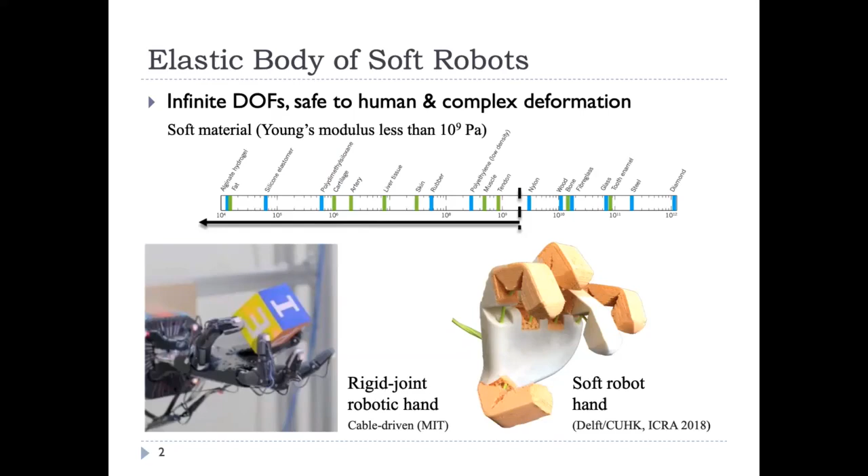We started this project on soft robots while working in the Netherlands, because the Netherlands is very keen on using soft robots in many agriculture applications and biomedical applications. We started projects from this kind of setup, and here are a few examples of soft robots that demonstrate the environment of soft robots, like pick and place of objects which are very soft.

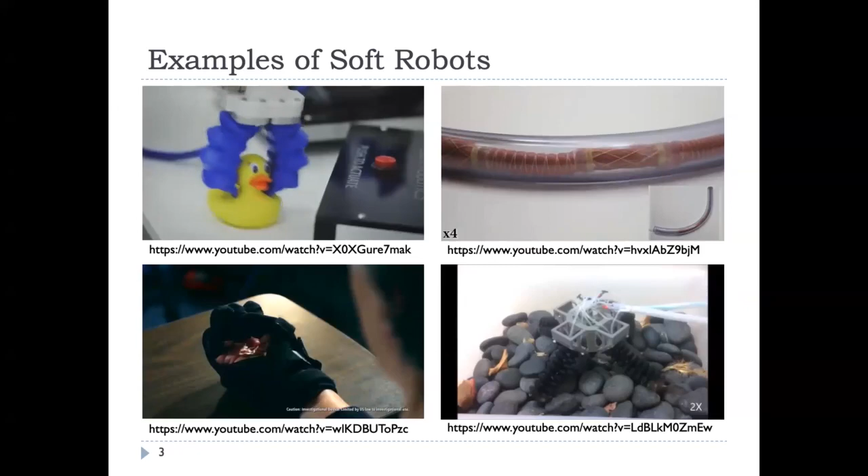One of the very advanced functions of soft robots, instead of hard body robots, is that they're very good for exploring environments you have no idea about. A major function of soft robots is that they allow collision, instead of the general motion planning of a hard or rigid body robot, where an articulated robot is designed to avoid collision. Soft robots try to use collision to explore unknown environments, and the material compliance provides a great opportunity for grasping and manipulating objects with large variation of shapes and geometric complexity.

Here's one example of why we want to do this, because we are actually a design manufacturing group. But if you look at soft robot problems, many of them come back to the design problem - how you're going to design it.

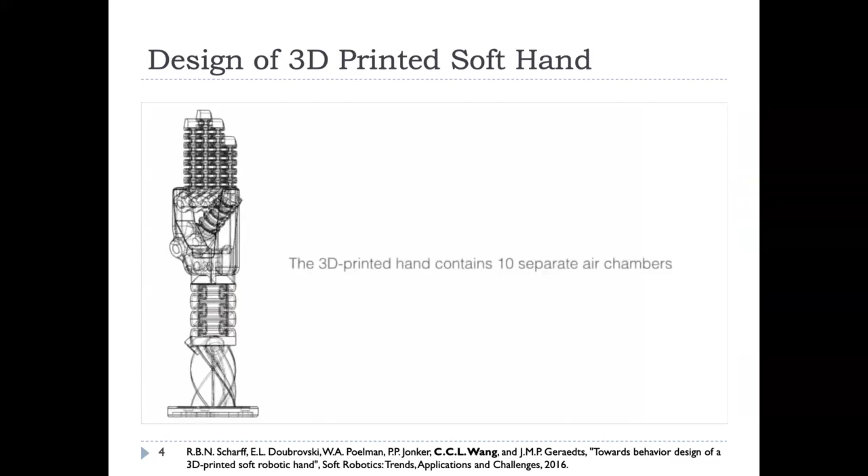10 chambers. This shows how complicated the channels inside this soft robot hand are, and how this soft robot hand is able to generate different kinds of displacement, different kinds of deformation, and how you're going to well control this deformation.

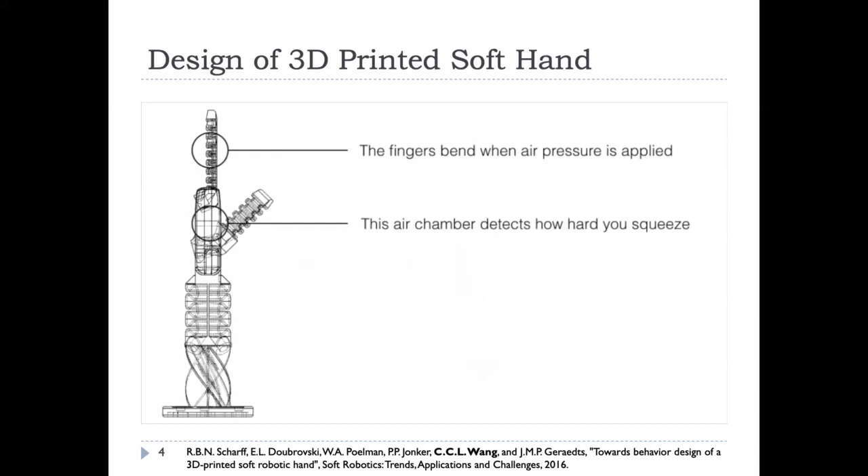There are a lot of design problems there. This is because at Netherlands, I'm working in the industrial design faculty. And so this gives us a lot of interest to see why we try to use soft robots, how to manipulate, how to control those soft robots. And then this brings a lot of challenging problems as well, because basically this is not a well-defined problem, and also brings many grand challenges, which I would like to highlight a bit in the following slides.

But before that, let's consider the conventional robot versus soft robot. What's the major difference? Conventional robots, no matter if it's an articulated robot or delta robot, have limited degrees of freedom. This is a general setup, so that's why we can get all those analytical formulas for kinematics, which can be used in control theories to control the manipulation or operation of rigid robots.

If you're looking at soft robots, basically they have a large number of degrees of freedom in the deformation, which is hard to control. They also have a very small number of degrees of freedom in the actuation. Think about the real actuation we have in the soft hand, like 10 chambers - we only have 10 different flows which can be controlled. So the degree of freedom in the actuation is much, much lower compared to the degree of freedom in the deformation, which is quite a challenging problem, and we are trying to really tackle this problem in our research.

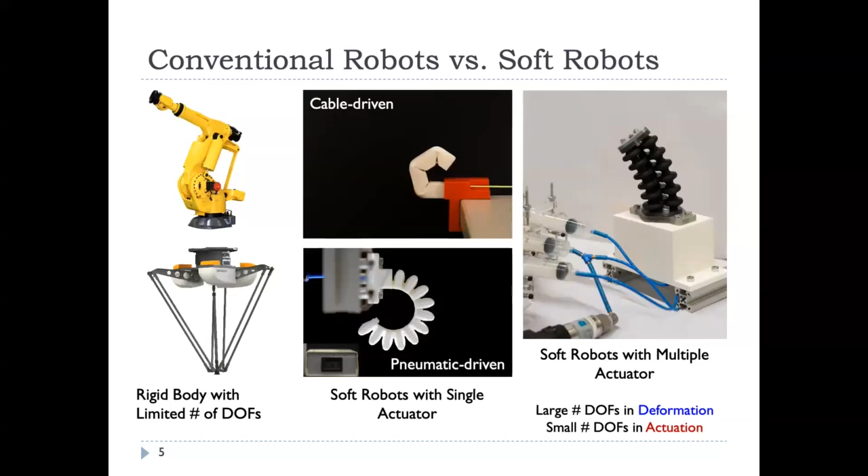One is rapid design tools, which are really lacking, because you need to have a simulation-based optimization in the loop of design. Consider finite element analysis - even for linear deformation or linear material deformation, it takes an extremely long time. Not to mention the material we are using here is in general highly nonlinear - you have hyperelasticity, just like silicone, which is the kind of raw material really used in our soft robot body.

And also there's the means of fabrication of low-cost soft robots. Of course we are largely using 3D printing technology and also some existing components which provide softness and compliance in the mechanism, but the fabrication is still quite tedious nowadays and it's not really well controlled. That brings a lot of problems to the following control issue, because the same file sent to the same printer using the same type of material generates different deformation behavior in general - this is because room temperature, humidity, all these things will have an influence on the soft body you fabricate.

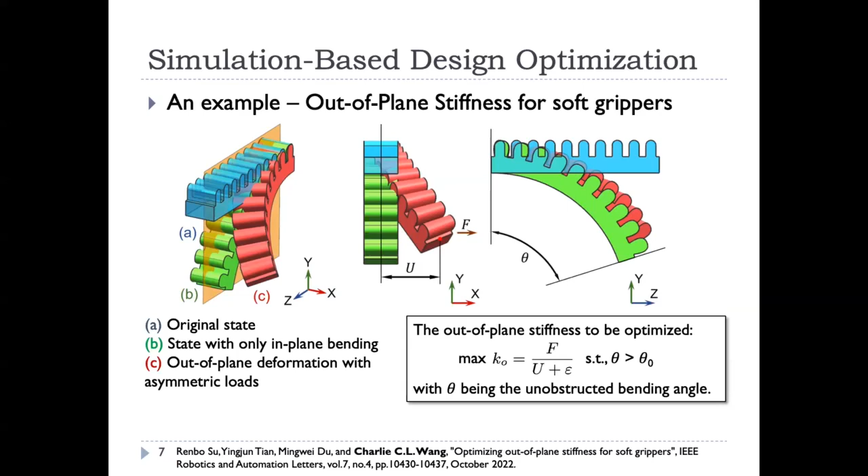So then we define our objective function, which is like the force divided by the out-of-plane displacement - basically we're trying to maximize this sort of thing. And unfortunately, for the design itself, when we parameterize it, you have many parameters which are going to influence the final performance.

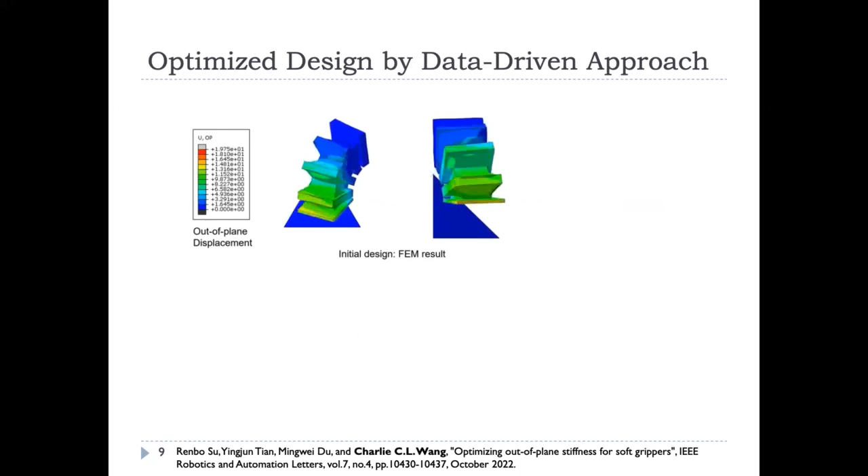So the general practice of design methodology is you need to do a kind of sensitivity analysis and try to reduce the dimension. We're trying to reduce the dimension from 8 into 3 or maximum 4. Based on this sensitivity analysis, we decide parameters like LA and height, which give totally different performance in grasping. Then using this analysis, we use a data-driven approach to do simulation by FEA, and try to learn a design space representation in the high dimensional space. And according to that representation, we optimize the performance.

Here's one example to show why design is so important in soft robot design. If you look at the optimized one and the unoptimized one, you find this one gives much better performance in grasping and caging. It's really the same material, the same amount of material. We only change the combination of how you use that material, which gives better performance.

In general, this method can be widely used in many different aspects of soft robot design, because you basically use simulation in the loop to simulate how the deformation happens, and according to the performance of the deformation, that helps you improve the design.

It sounds quite simple, but if you're really trying to use this in a real-time problem, or trying to predict the behavior of a soft robot in a control problem, not only control but also simpler setups like a planning problem, you have a lot of challenges.

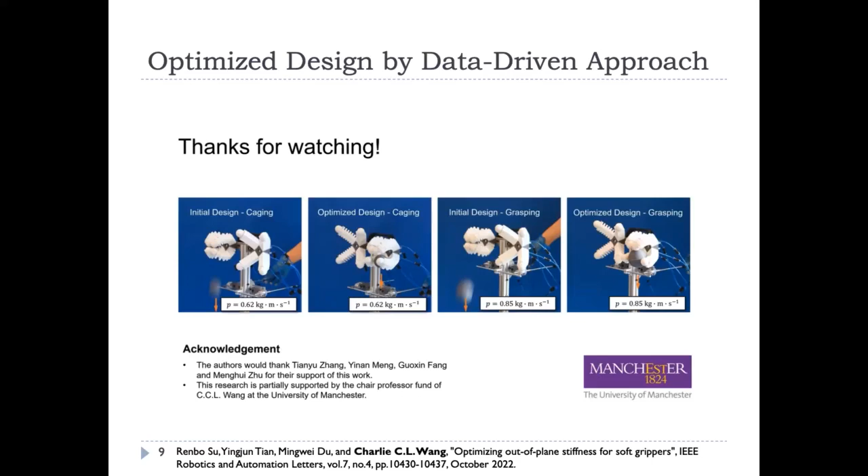One of the major issues is that finite element analysis is extremely slow. So our research moved into trying to develop a better simulation. Basically, this simulation will be used as a kinematics calculation method or solver to tackle the kinematics problem, starting from the forward kinematics problem.

This is a general setup. For those of you with a robotics background, you understand this can be easily calculated by simple analytic formulas. But if you move from rigid robot to soft robot, this relationship becomes highly nonlinear and doesn't give you a good way to predict the deformation. So we need to tackle this issue.

A bit about literature review: how people are tackling this problem at the moment in the general soft robotics area. One thread of research uses a simplified model learned from solid mechanics and differential geometry, assuming, for example, constant curvature deformation. To me this is too simplified, because if you think about very complicated geometry on a soft body, it doesn't give you constant mean curvature deformation. But people say they're able to use this to get an analytical solution and use it in kinematics and control.

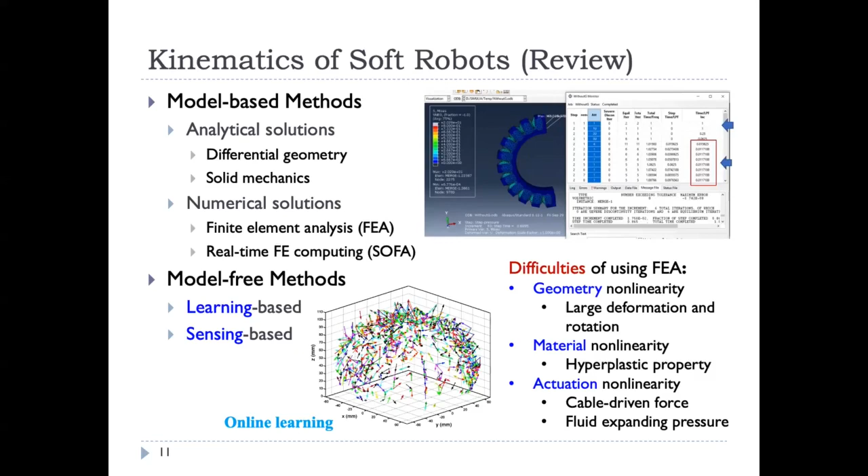And then also the actuation nonlinearity. If you're using cable-driven or fluid, like pneumatic and hydraulic driven soft robot actuation, basically the actuation itself has a certain level of nonlinearity. So all this nonlinearity put together makes this problem even more challenging to be solved.

So I think we started this project 5 to 6 years ago, and we are trying to really bypass FEA. So this is quite a robotic solution, although I come from the design and manufacturing area. In design and manufacturing, people always seek help from solid mechanics or fluid dynamics trying to solve this problem. But robotics guys solve the problem in a different way. They just see, and then they try to repeat what they see by a so-called simulator.

So this is what we learned from the computer graphics community. They provide a way to generate nice animation in their movies. This is a deformation method used by Pixar in their computer animation movies. So we're trying to borrow this idea here, and then we're able to use robotics methods to calibrate those material properties based on the simulation we're able to achieve. So that is the basic idea.

We are trying to use this so-called simplified deformation model to bypass finite element analysis. The nice part is that computer graphics scientists have already developed those deformation models, which can capture large deformation and large rotation much more easily compared to finite element analysis.

Okay, so the simulator we developed here is able to cover different actuation, including cable-driven actuation, dielectric elastomer actuation, and also pneumatic and hydraulic actuation. So basically, if you consider these 3 different types of actuation, all of them share one common property: the actuation itself can be very easily measured by geometric properties.

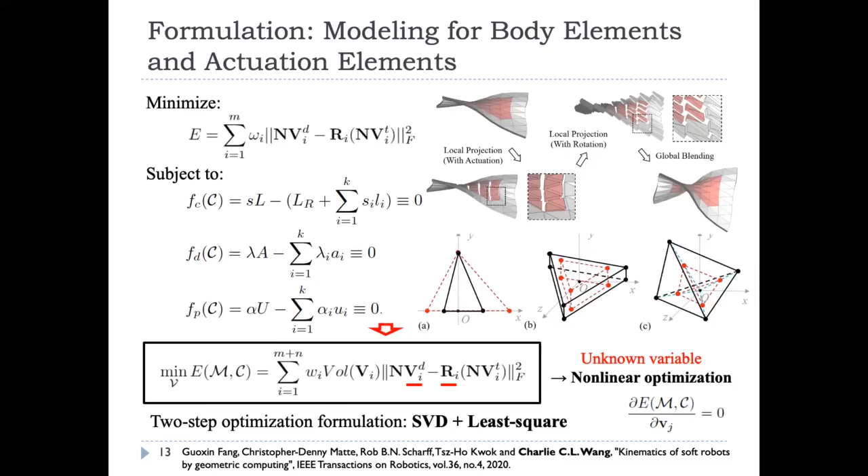Okay. And we could further introduce different material properties into it, because we are able to provide parameters to control the allowed volume variation. If you allow the volume to largely deform, then of course that's a soft material. If you do not allow the material to have a large volume variation, that's a hard material.

And then relatively, we're able to calibrate what coefficient is going to be used in our simulator by using this kind of relative deformation measurement, which can be easily generated by a vision system, and then provide a good calibration result of the simulator. Okay, for the details, because of the time, I will not introduce them.

And some people will ask, oh, you're using a simplified model, and how likely is your simplified model going to really mimic and regenerate the real deformation result? So we compare with Abaqus. Okay, so this is the simulation of the Abaqus finite element analysis result, and this is our simulation result. We apply the same loading, and then the shape is the same, but the speed, we are able to generate like 50 times faster compared to FEA.

And then this is still not fully accelerated by graphics hardware yet. So if you apply it to GPU, we can increase speed by around 10 times. Okay, so in general, 500 times faster compared to FEA, which provides the opportunity to use this simulator in different scenarios, including control optimization, and also how you are going to really predict the deformation by optimizing not only the shape, but also the actuation and also the sensor.

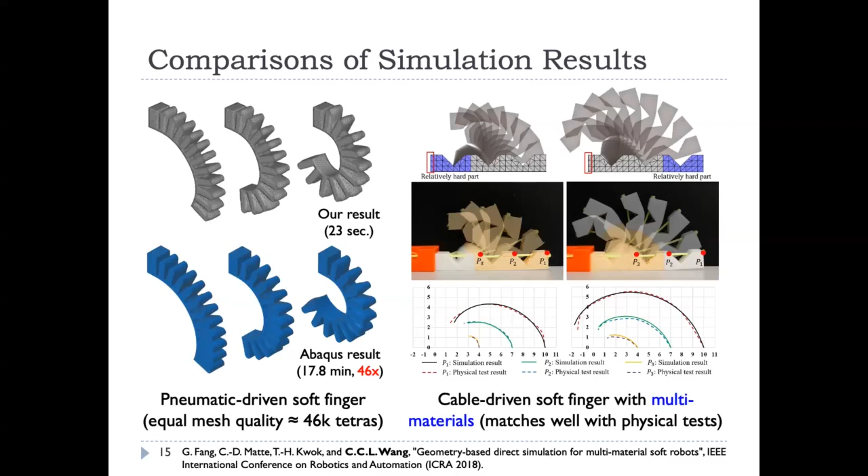Okay, so you can see the error is relatively small, but for this one, I think the friction actually contributes a lot to this error, the difference between the simulation and the physical setup. Okay, and the other issue, as I mentioned at the very beginning of today's talk, is that collision is something you cannot avoid in your simulator, because the general principle of the soft robot is that we are going to use collision to really explore the environment. And collision plays a very important role in all those grippers' deformation.

Think about the single finger gripper, how it's really deformed. It's only because of the collision between the neighboring teeth. You have two teeth which inflate, and then they're going to collide with each other. And this collision actually gives you much better performance, letting the gripper bend by using very small pressure. Okay, so using small pressure, you have a large inflation, and then the inflation between neighboring teeth really pushes each other to have a better deformation. It's more easily bended.

Okay, so are we able to really simulate this in our simulator? Okay, so again we borrowed expertise from computer science, and we're really using AABB-based trees to speed up the computation. But the other aspect is how you're going to handle this collision, which is very important, because there are many ways to handle collision. Some of them are differentiable, some of them are not differentiable.

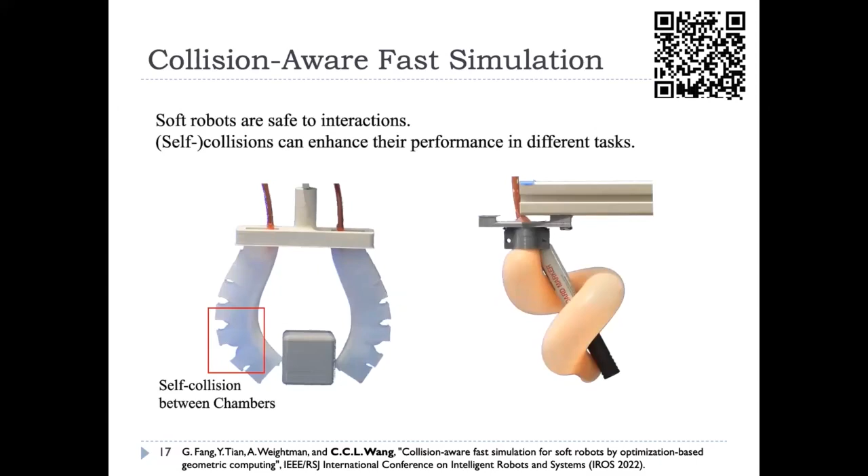And then this shows some demonstration of how well it can capture the deformation and the collision between the neighboring teeth. So you can find this is the real one. The teeth really collide with each other. And then this is another one where the chamber has a large volume variation, which is not easily handled by Abaqus-type FEA simulation. One major issue is that they heavily rely on a remeshing process. Unfortunately, the remeshing process is not always stable because of numerical calculation errors.

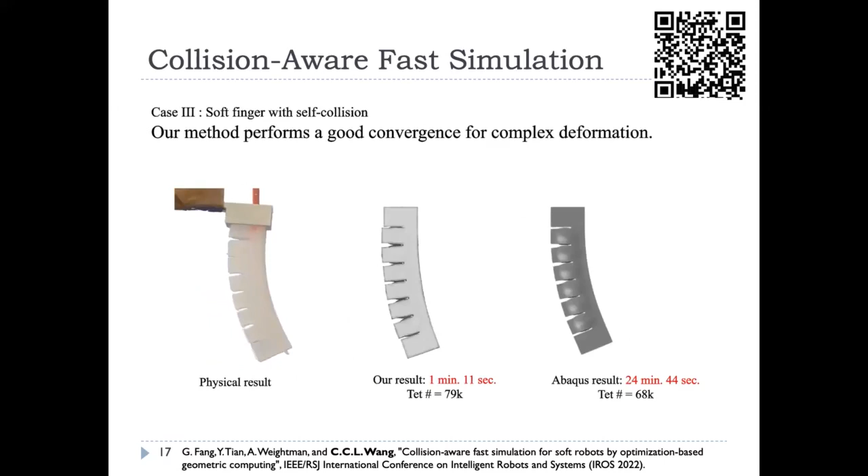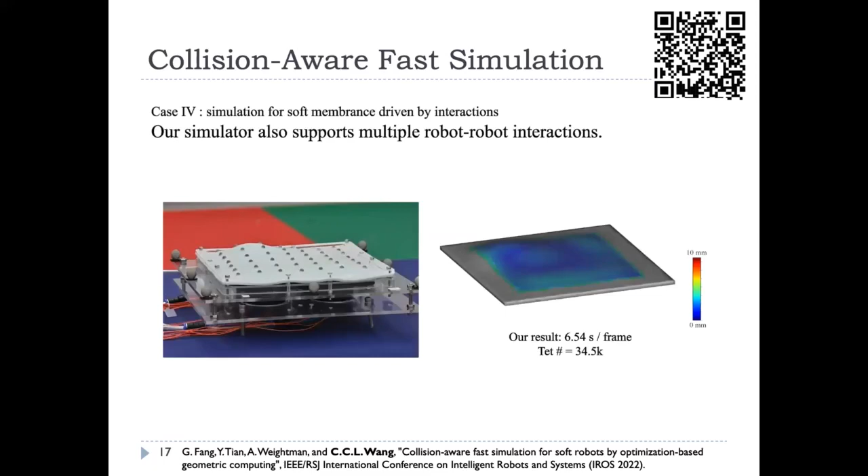And then this is another simulation, and this one has 25 times the speed up. And then this shows another setup of soft robot. It's like a soft deformable interface, which can be widely used in many molding processes to have shape-controlled molds in different fabrication applications. I will demonstrate one. And of course there are many other scenarios where those deformable interfaces can be used in design manufacturing.

So now we have a very fast simulator, right? And that means we have a very fast forward kinematics model. Are we able to use it in control? Let's say we're trying to solve those inverse problems, like determining the actuation which is able to drive your robot into a desired deformation, a desired deformed shape, okay?

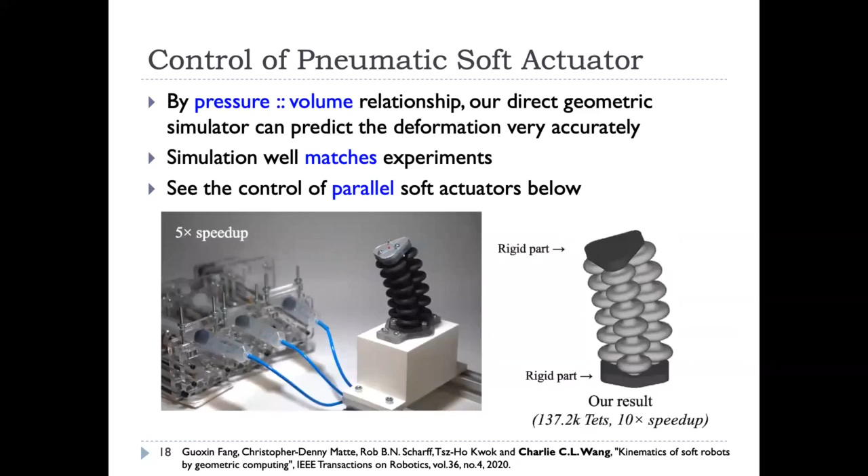So this shows our setup. We're trying to demonstrate our soft robot simulator being able to really generate simulation and capture the physical environment very well. So basically, this is our setup, and this is our simulation result. We can find this is really well captured, okay? And then we are trying to use it in the inverse design problem.

So basically, inverse design or the inverse kinematics problem here is just an optimization problem. We are trying to optimize the setup, we are trying to optimize the actuation, so it turns out to give you the deformation. This is quite a straightforward problem if your simulator itself is differentiable, okay? Starting from a very simple setup, say the mathematics is not differentiable, but numerically we can easily use finite difference to calculate its gradient, okay?

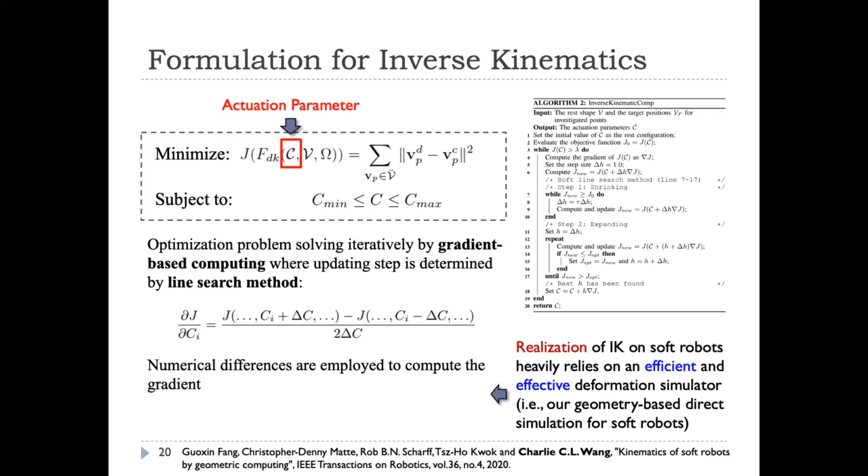We just used this simple method in our paper, published 3 years ago. Using finite difference, we were already able to achieve a very good inverse kinematics result. Okay, so this is an iteration step of the IK solver. I don't want to go into details. Let me show you a bit of the result which we can achieve by using finite difference in the inverse kinematics.

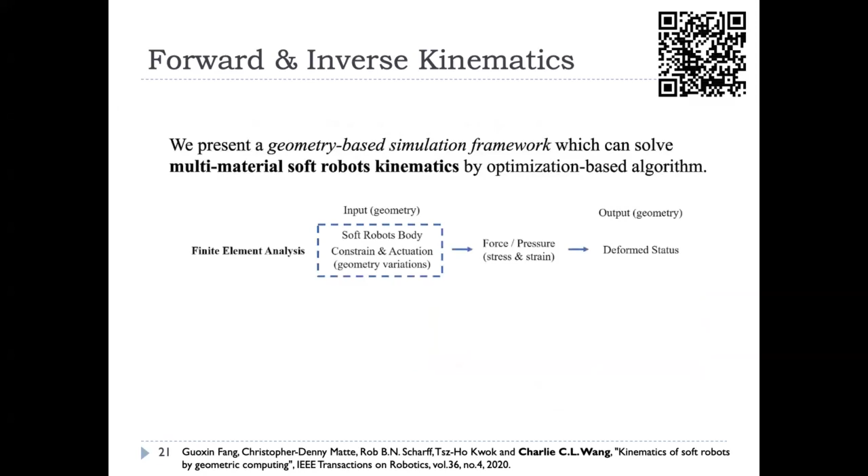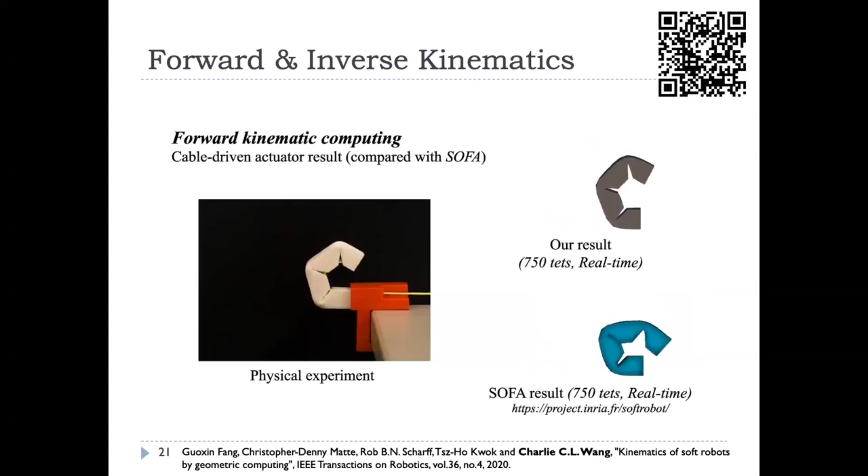Okay, so we're using two setups. This is a string-driven robot, and that's the pneumatic actuated one. And again, we are trying to avoid force measurements and force prediction, so we generally use straightforward geometry-based calculation. And compared to other simulators, this is a simulator SOFA, right? So sorry to bring it out.

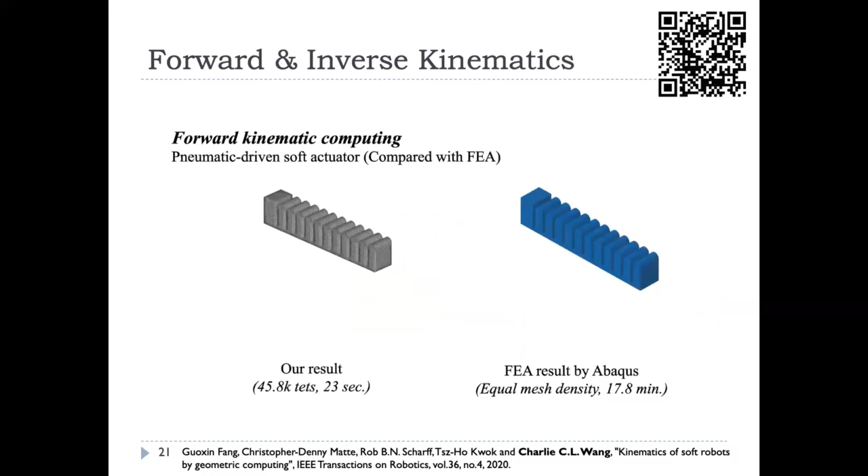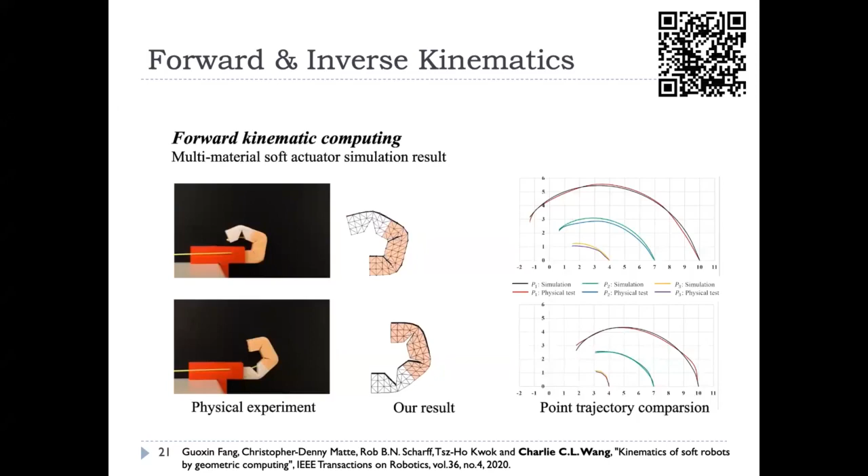And I don't want to be too offensive, but in reality, SOFA itself is based on the integration of ODEs. So it accumulates all the errors into the large deformation, which you cannot avoid if you're using those ODE solvers. Fortunately, we're not using ODEs, so we don't suffer from this issue. We directly use the least squares solver. So this is a much better simulation result, and different materials can be supported. The different colors stand for materials with different Young's modulus used in the forward kinematics.

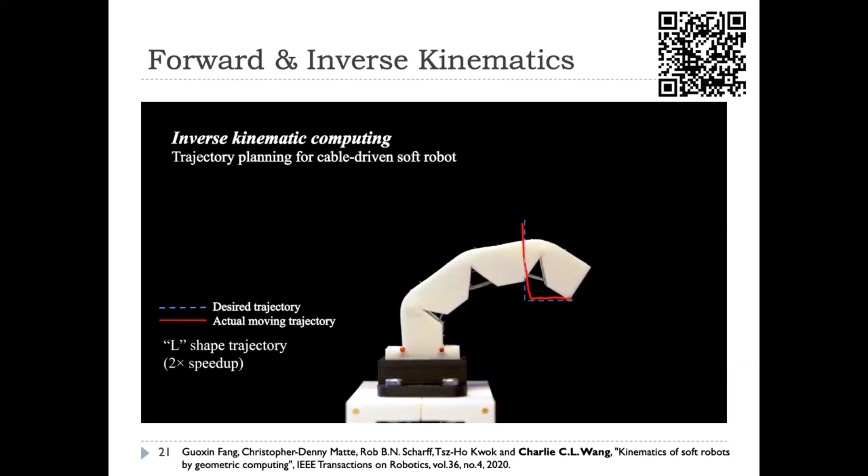Now we start to demonstrate inverse kinematics. This is a bit misleading, but it's a 2 times speed up, so you can sense the speed. We are calculating the actuation from every waypoint, and are able to drive the robot to really follow the given trajectory as a target. Okay, this is 2 times speed up. So this is inverse kinematics, how we're able to drive this soft gripper to follow the desired trajectory you want to achieve.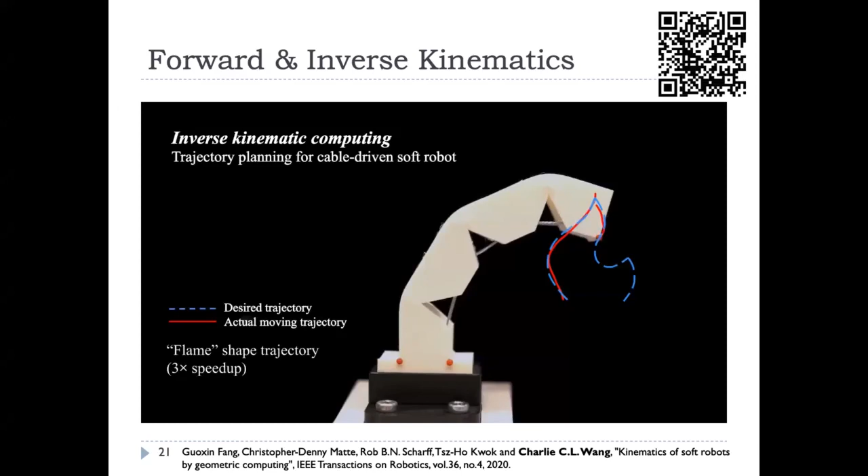And basically you don't use anything else. It's just inverse kinematics, nothing else. So we basically use no sensor yet. I hope I have time to complete the sensor part; we also do some sensing stuff. Okay, so this is the inverse kinematics calculation, and that is string driven. And let's go forward.

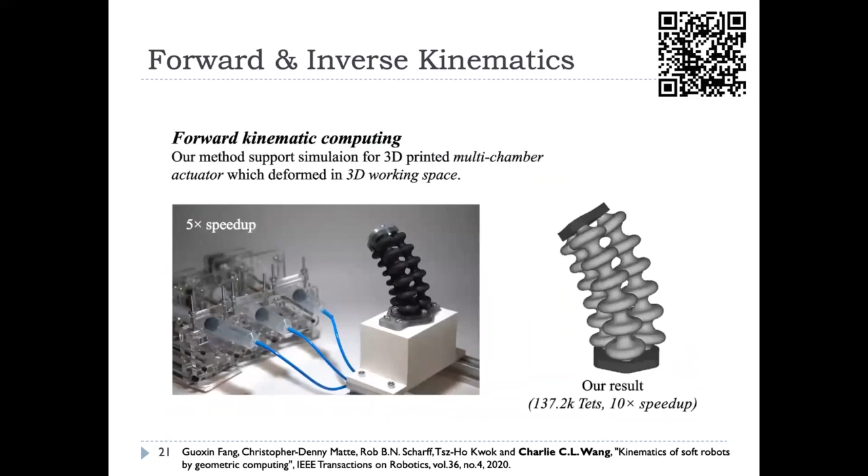So this is how we measured the volume at that moment. This is a 3-year-old setup. The volume can be easily measured because it's again a geometric parameter, right? So we can control the motor to control the volume of air you compress in. But one major issue is that air leakage was really a major issue at that moment.

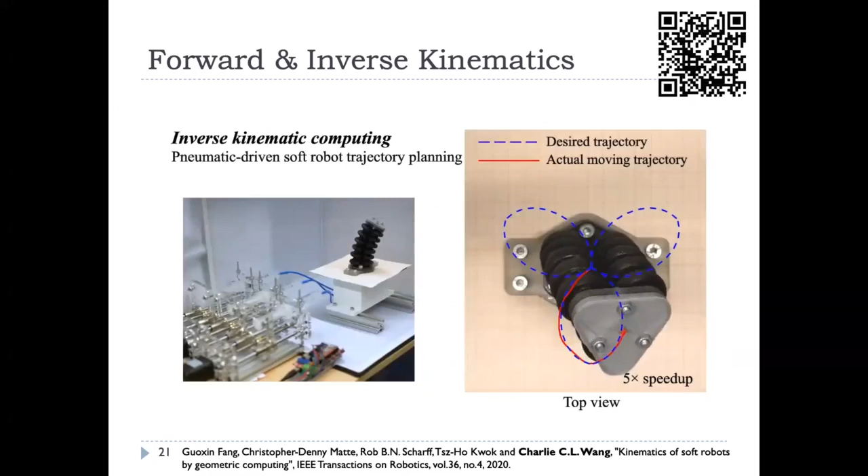So we change the setup later, but this is still good to really demonstrate how we're calculating the inverse kinematics. And this is how the robot is really driven to follow the given trajectory. You can see those syringes, really pushed by the motors to give you a certain amount of air you're trying to pump in.

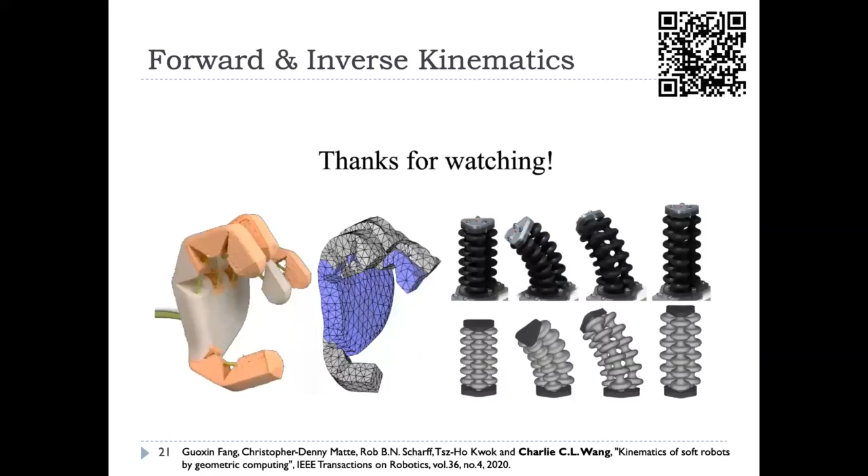Right, so this is the forward and inverse kinematics problem already solved. But with only inverse kinematics, it's not good enough, because although it's already very fast, it still cannot achieve real-time inverse kinematics calculation. So we think about a different way.

What about we replace our simulator with a neural network? It sounds like a very straightforward idea, but we're trying to avoid calculating the Jacobian. So basically, we learn the forward kinematics and the Jacobian mapping at the same time. Because we have our own simulator, we can keep running this simulation many times, and we're able to learn the Jacobian.

Another piece of work we included is that we're trying to fill the gap between simulation and the real world. This is called a real-sim-to-real network, a very simple network, just one or two layers of a forward neural network. But you can find that it captures the error very well.

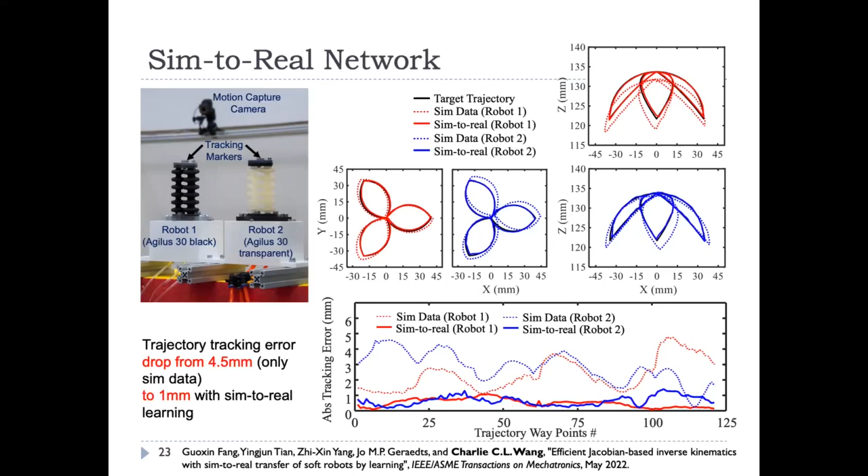The good aspect is that with just a simple run of motion capture, say a few minutes, you're able to capture the difference between the simulation and the real, and by fitting it into supervised learning, you're able to fill the gap.

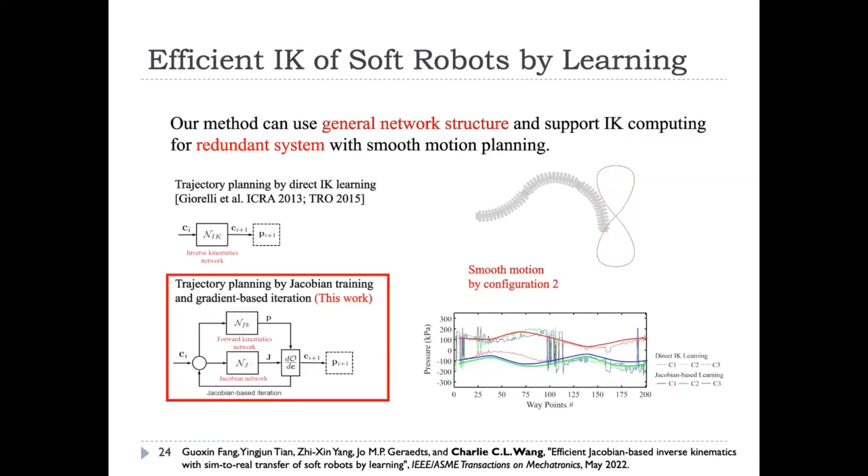The good aspect of learning a Jacobian instead of directly learning inverse kinematics is that inverse kinematics is not a one-to-one mapping problem—it's actually one-to-many. So learning the Jacobian helps you easily overcome singularity issues during manipulation, because iteratively you always drive your solver to a continuous solution based on the previous step.

With the help of that, this is quite a challenging issue for those doing singularity analysis—this is a singular region. So basically, how can you easily go through the singular region? Because the numerical gradient drives you through it, and since a neural network has an assumption of a certain level of smoothness in the function, that helps solve this issue.

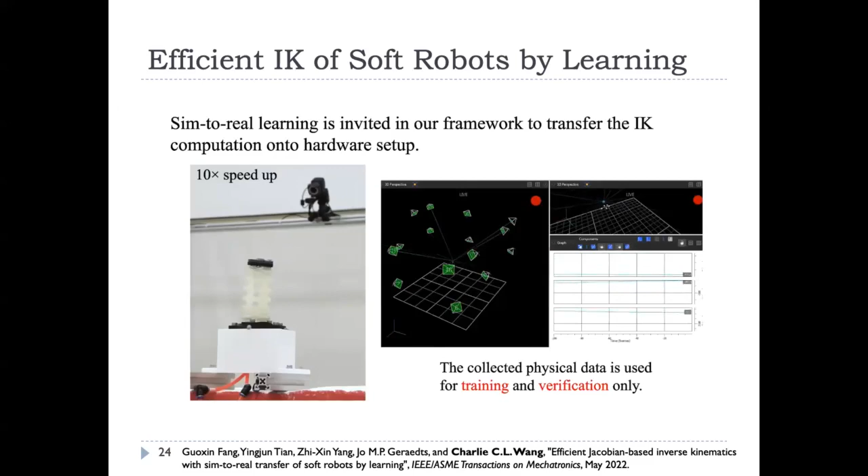With the help of sim-to-real, and using the motion capture we conducted with cameras, we're able to realize interactive control of the soft manipulator using this setup.

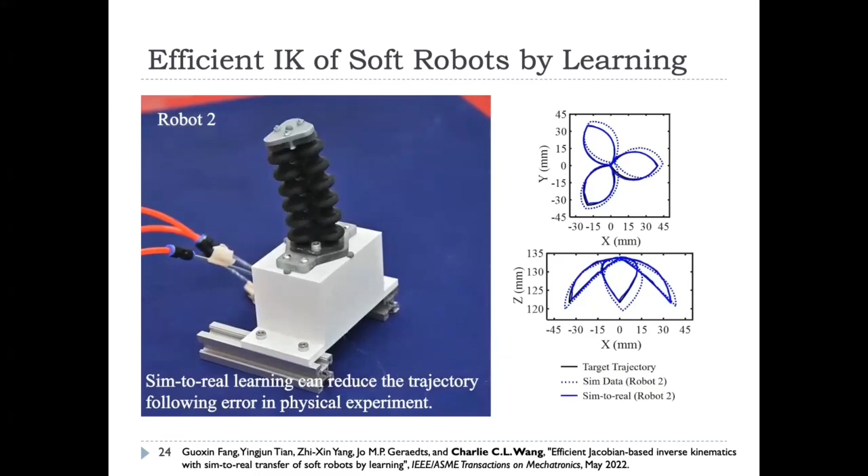So this is real—this is about how the actuator is driven by the inverse kinematic solver. This is robot 1 and robot 2, both the same design but different material, given different trajectories. When you feed the same actuation, we need to fill the gap.

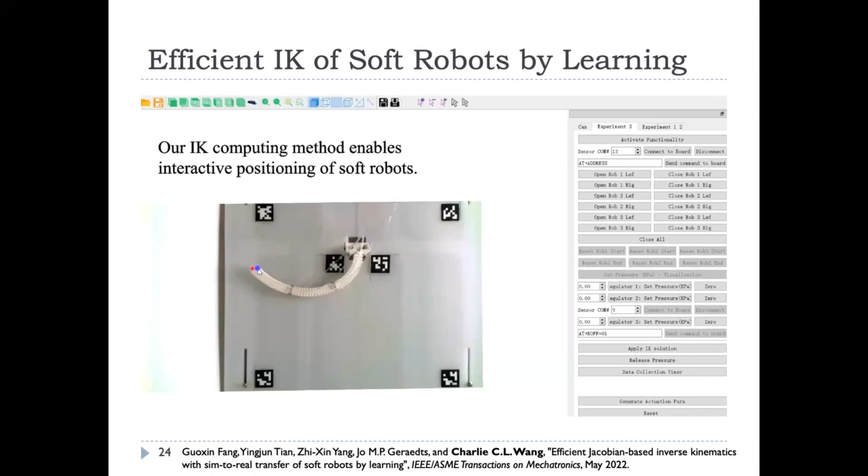This shows the interactive control. You can see, we want to move it here—of course you see a certain level of difference. This is mainly caused by friction between the manipulator and the plate. This is actually a 2D setup, not quite like reality, because we're trying to avoid the influence of gravity, but the friction still brings a lot of problems, which is why we have a certain level of error. But you can already see the interactive behavior of this calculation, because this is real-time.

Okay, after that, all those inverse kinematics calculations are solved in the scenario without any loading. So what about if we have loading there?

We need some way to really sense the deformation by using sensors. With the help of those sensors, we're able to predict the deformed shape of the soft robot. With the deformed shape, we're able to apply control to further operate the soft robot. So in parallel of our inverse kinematics research, we also do research about how to sense the deformation. This is called proprioception.

So the major challenge of this sensing is the compliance of the sensor itself, and also how to capture the large degree of freedom of deformation and large rotation. All those are very challenging issues that need to be solved.

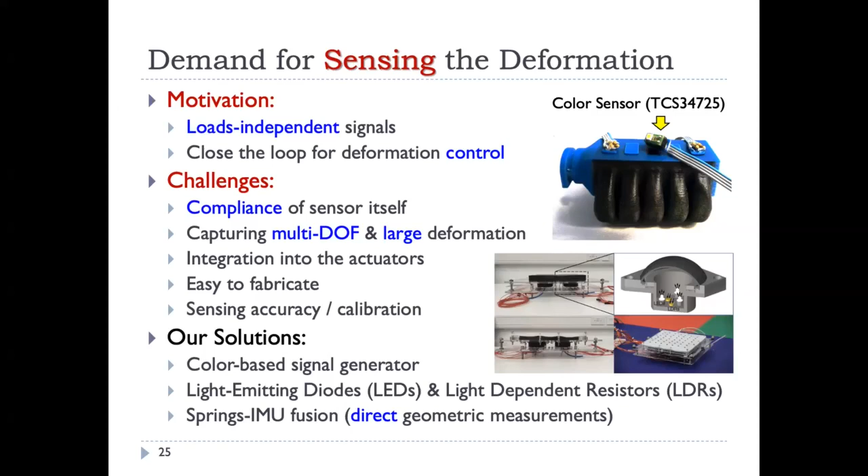Our solution is to try using cameras, or lighting or color signals, because those are things less influenced by force or other factors. This is the first setup. We're using color sensors, also LEDs and LDRs, trying to sense the deformation by shading and light intensity change.

This shows one design. We're using 3D printing technology to print different color patterns inside the chambers. So if you insert a sensor here, with different bending behavior the portion of the magenta which can be sensed is different. Then your sensor generates a different signal, and we demonstrate how, with the help of this signal, we're able to capture measurements related to curvature.

It's not really the curvature, but with or without loading, when you have the same shape, our measurement gives similar values. That means this measurement is not really influenced by the loading — basically loading-free measurement. So for soft robotic sensor design, it's very important to introduce sensing methods which are loading independent, because if your sensor is loading dependent, you basically have no control over the deformation you want to achieve.

Again, we're using a neural network to try to capture those things. Now I'd like to jump into the detailed measurements.

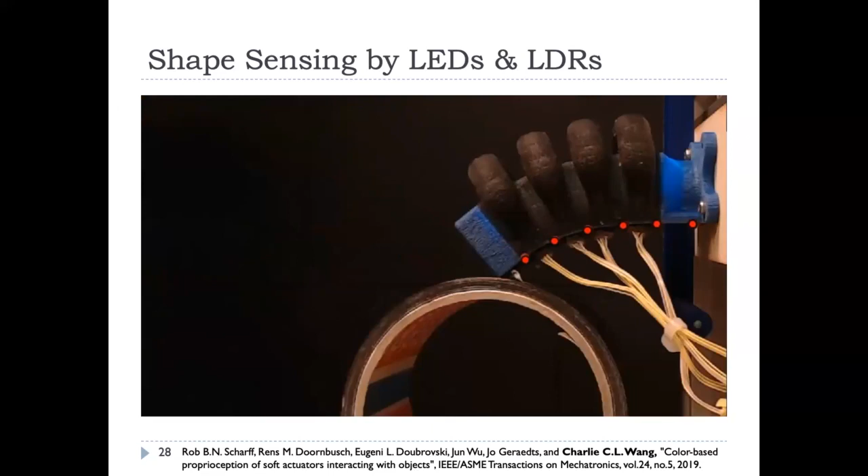Starting from time delta T, this marker is predicted, and this is the real marker — you can see how well they are aligned with each other. The prediction is made by those color sensors inserted at the bottom of the gripper. It's actually measured very well. This is a real-time playback.

Then we try to generate different distortions. This is never a constant curvature deformation — it's a double curve. So you cannot use the constant curvature assumption in this kind of deformation. This further proves that the assumption of constant curvature is wrong in the real manipulation of soft grippers.

We further demonstrate that it has less influence from loading. We change the applied pressure, and when the actuator interacts with obstacles, we're still able to predict the deformation very well.

In terms of time, I'll skip ahead to the next piece of work. Again, we're using different sensing methodologies to sense the deformation, but this time we try applying some loading. This is another very simple soft joint, easily fabricated, low cost, with all components off the shelf — no 3D printing at all. We put LED lighting sources inside and LDRs for the sensor.

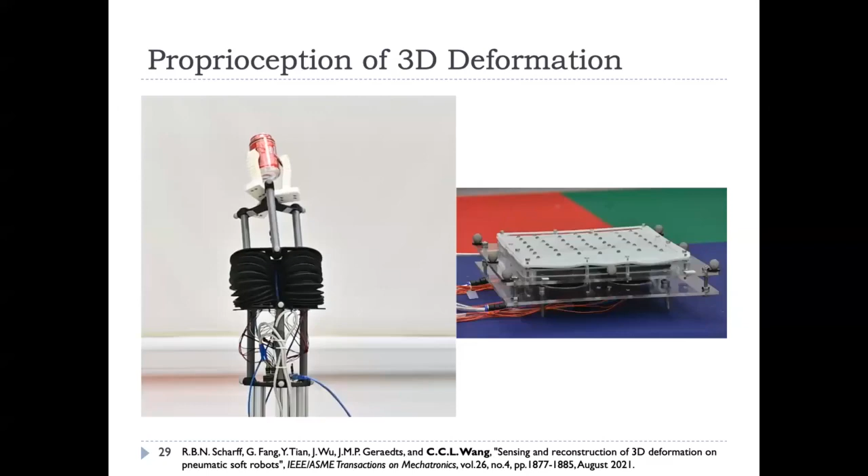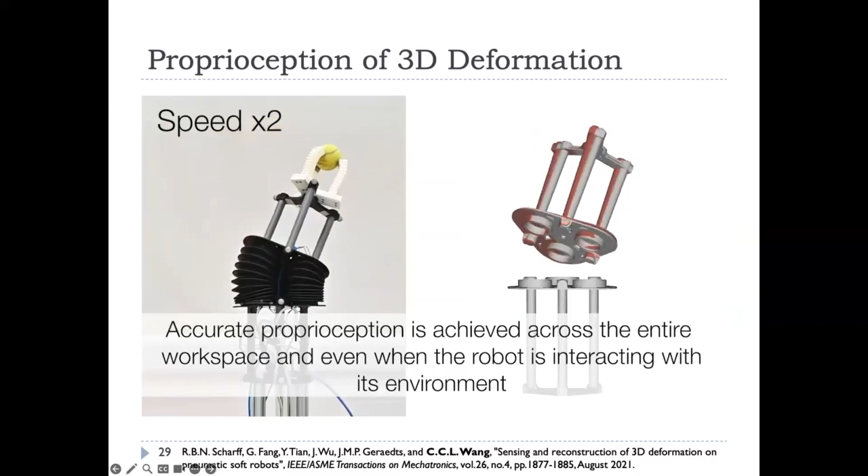So basically we're able to predict the deformation very well. Here comes the result: with different loading, we're still able to capture or predict the deformation by sensing signal only. The gray ones are the ground truth, and the red ones are what we predicted. Although there's some shaking or signal instability, we're still able to capture the status very well. This is applied to a joint.

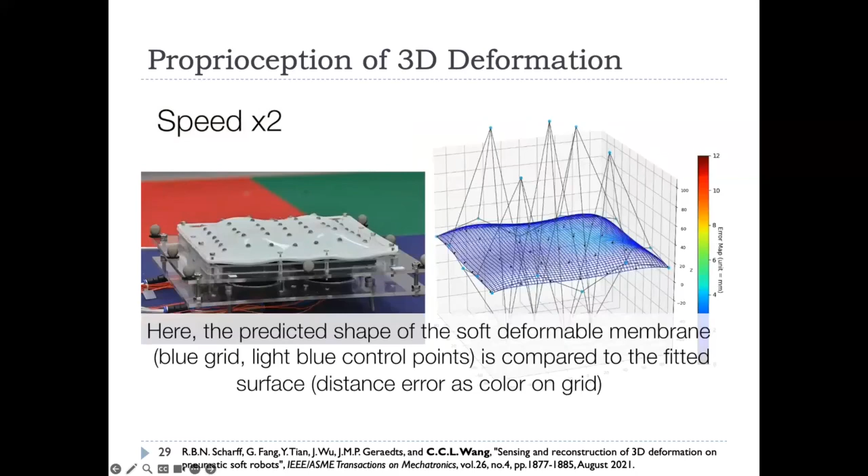And this applies for freeform deformation surface. So there are 4 chambers, and those are dots I used by using motion capture to generate the ground truth of the shape for the measurement.

And for the real usage, then we have this kind of markers. You can see this color map shows the error. So you can see actually we can predict the shape very well by using those sensors.

And so we recently started using sensors to provide feedback control. We also upgraded our setup of those soft robot manipulators. So we have two segments, which is the setup of our soft manipulator. We call it a flex tail. It's like a flex pneumatic actuating linkage, which has 2 components.

This is the first generation. You can find that the nice part of it, it can generate large elongation, like 3 times the elongation, and large bending. This first generation can achieve almost 80 degrees of bending, but the next generation can achieve more.

The things we need for the sensing signal can be measured by geometry instead of other measurements. So we are using springs here to measure the length variation, and also using an IMU, a gyroscope actually, to measure the tilting angles and all those things. So we have orientation and length, which can be easily measured.

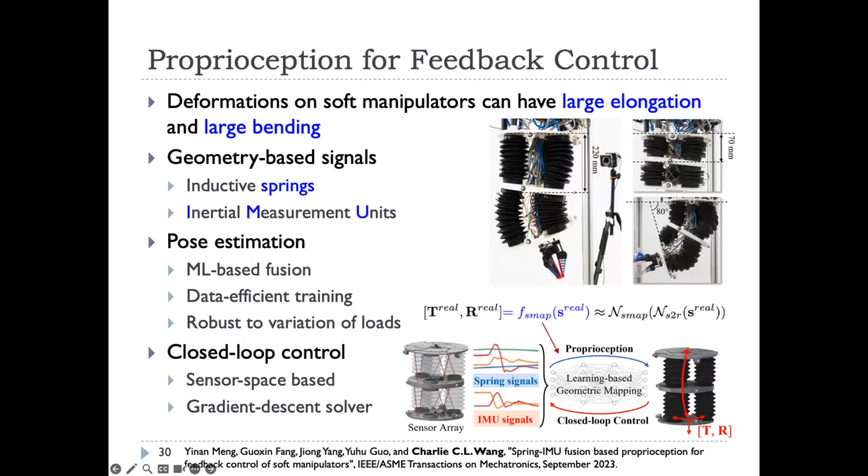With the help of that, we're adding another layer, which is like sim-to-real, and we're able to capture the deformation very well. In terms of time I don't want to go into details, but basically we learn this through the virtual environment working together with sim-to-real, and we're able to use it in real-time control.

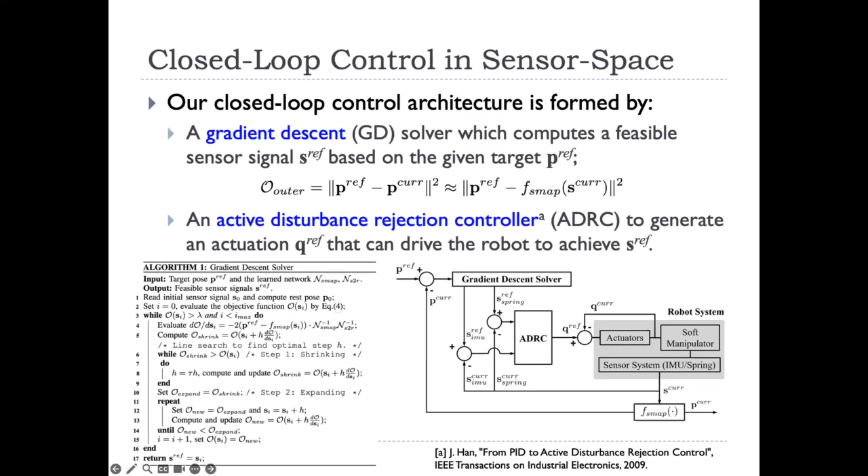Our control is again based on the iterative solver together with ADRC-based control for the relationship between the actuation and the sensing signals. For details, I don't want to go into that because of time.

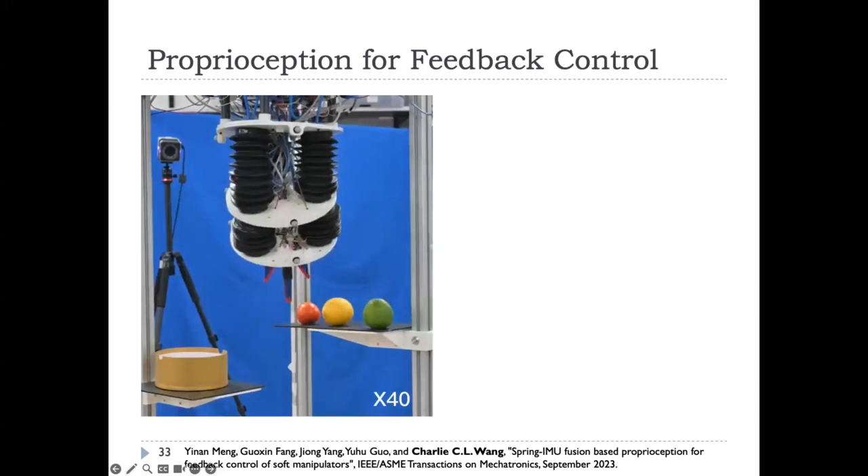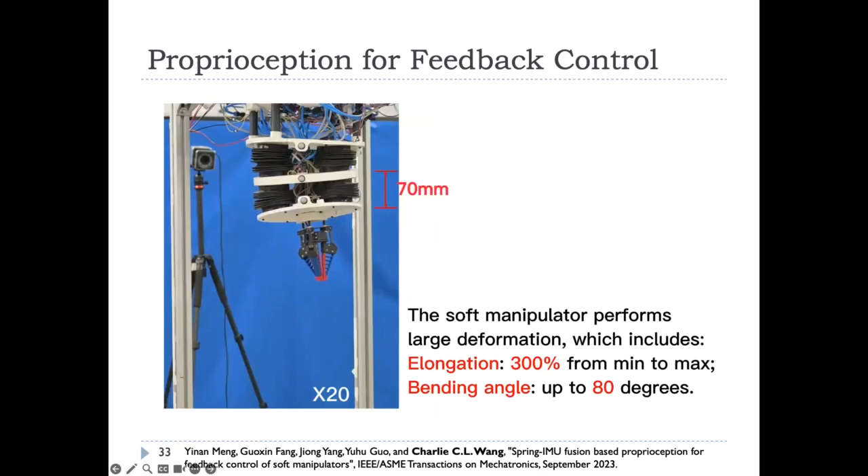This demonstrates how we are able to, again this is a bit misleading, it's like 40 times speed up. I'm going to show you the real time version which is going to apply in our recent setup. So it sounds like very fast, but actually not. This is used to demonstrate how large elongation can be achieved by this soft manipulator.

You can see like 3 times elongation, and we're using an IMU integrated here and a spring. If you have a chance to visit us, go into our lab, you'll see this is the first generation, but this is not operating now. We put it aside and started working on the second generation.

I saw the first generation. You saw the first one. You have not seen the second one yet.

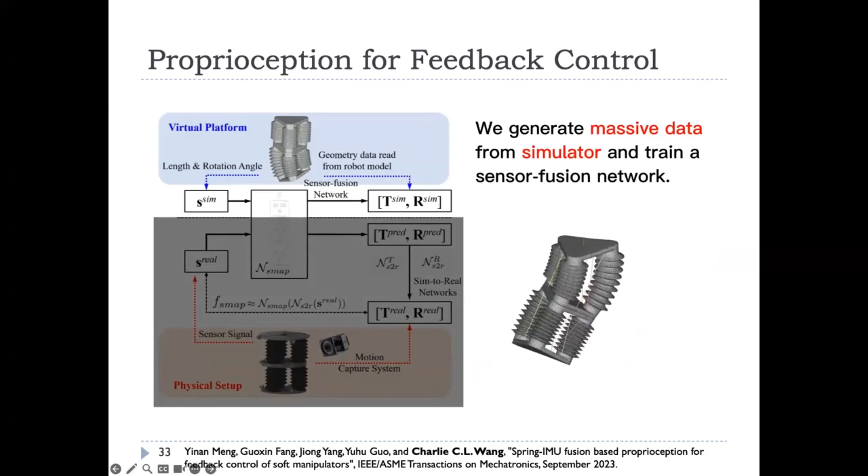Okay, so this is the first generation. You can see we can generate a lot of different poses and different actuations, and by this neural network, now we are trying to apply it to compare the prediction with and without loading, which is very important, right? You need to have very accurate prediction even after you apply different loading onto the same setup.

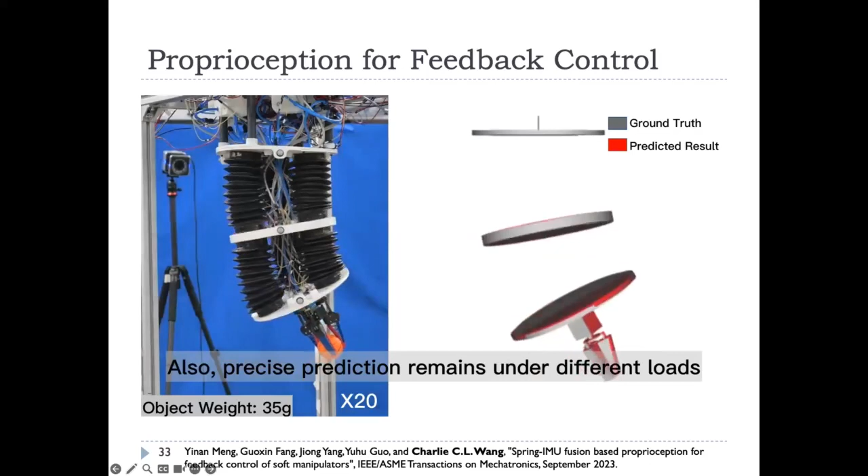And this is without loading. You can see the predicted result and ground truth match very well. Now we start to apply different loads. This is a lighter ball. And to further test, we apply a heavier object now.

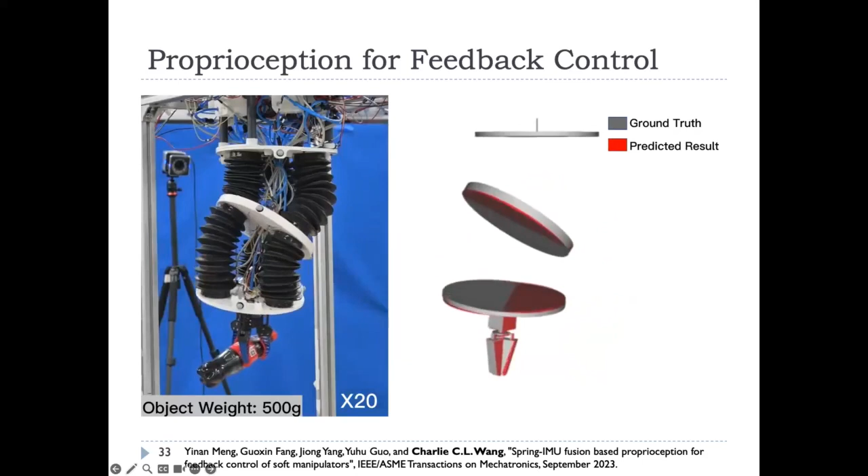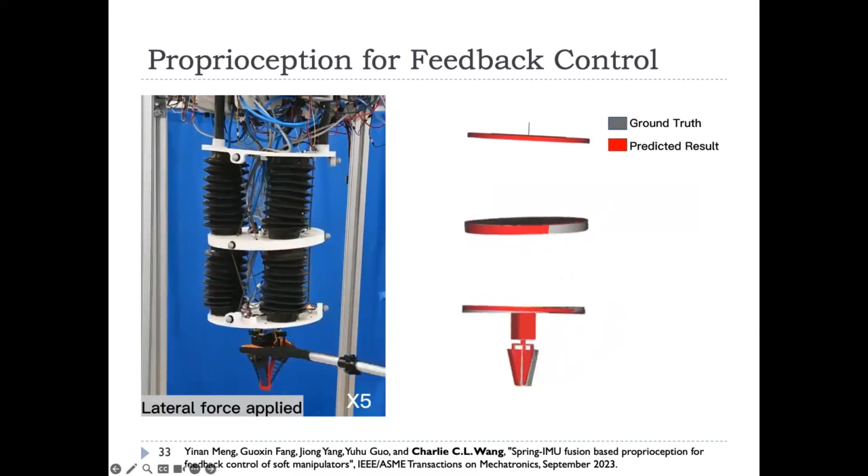This is more heavy, and we would like to further increase it to test the limit of this measurement based on the sensor. Now it's like 500 grams. So we started 35 grams, then 115 grams, then 500 grams. The reviewer asked us to further challenge it by using lateral loading, so we tried it, and it still looks good. We really appreciate the reviewer's requirement to add this into our paper, since it really demonstrates how good the measurement is.

So now that we have the sensor, we're trying to use it in the trajectory following setup and experiment.

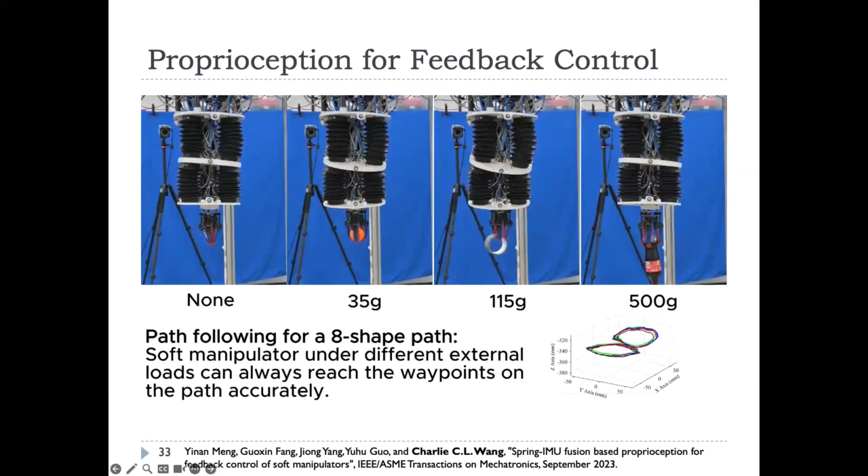I think I can finish in 5 minutes. This is the setup, and you can see it followed very well. I think it's very important to have all this integrated together to really achieve real-time usage of soft manipulators.

In this version, we removed our IMU, because the IMU is strongly influenced by the magnetic field around it, which makes it unstable. So we're building in more springs, which allow us to predict large deformation, bending, and rotation.

Now I'd like to introduce another project in my research lab using soft robots for design and manufacturing, basically for sustainable manufacturing. We use a deformable robot working as a mold to fabricate tailor-made, customized garments using a bio process, with recyclable material, simply like growing a mushroom on top of a mannequin, and this mushroom becomes cloth.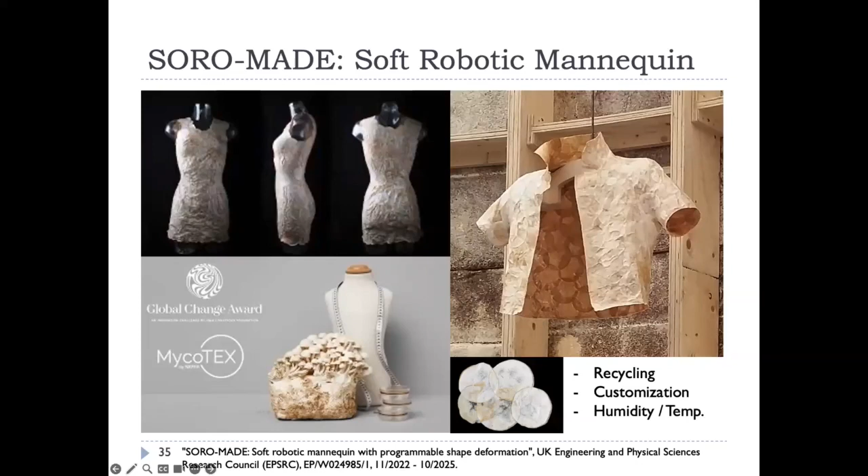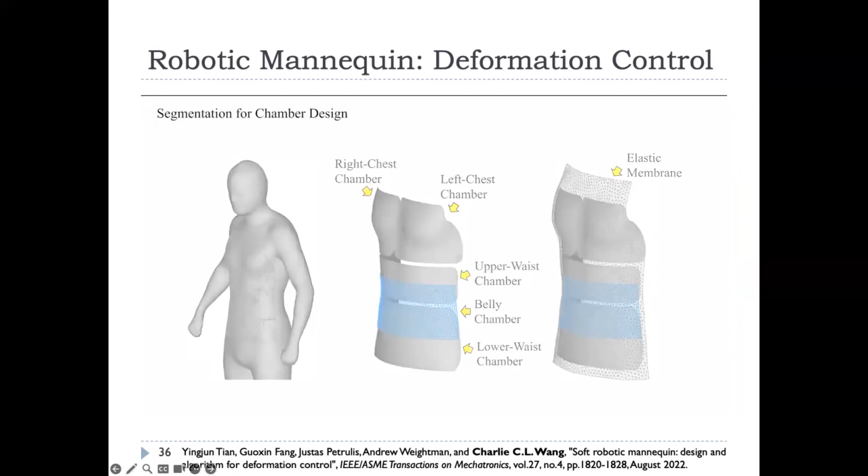This was invented by my collaborator from the Netherlands. Our contribution is developing a deformable mannequin which is able to deform into the client's shape, with chambers integrated together to achieve shape control. Again, this is an inverse kinematics problem, but this time we're not controlling one point, we're controlling the whole shape, wanting the shape as a whole to approximate the client's shape.

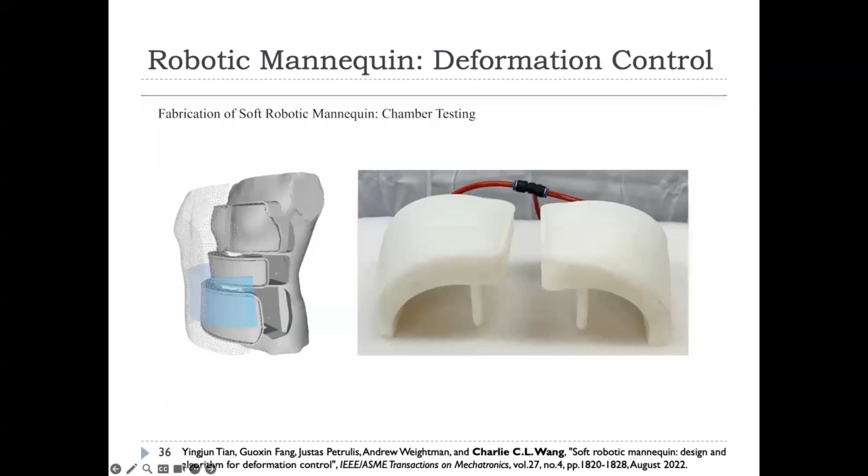So let's say a client comes to a 3D scanner and scans their body shape, and on the other side of the wall, a mannequin can deform into that shape, and you fabricate a garment on top of that mannequin. It sounds crazy, but this crazy idea got us an EPSRC fund, and we were lucky to get that funding to work on this.

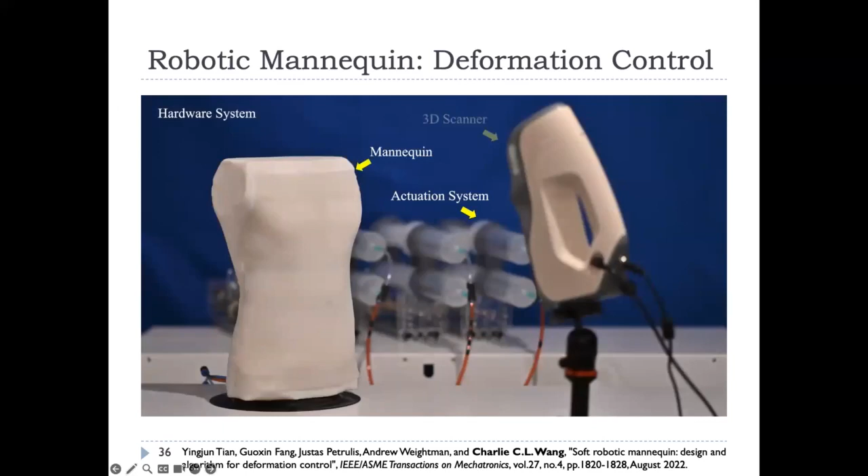This is the first generation. I don't have time to show the second generation here, but if you come to our lab, you're welcome to visit us, and you'll see the second generation is much more advanced compared to this one.

Then there's the syringe leakage problem, so we're trying to solve those motor and actuation issues. We developed an open pneumatic actuation system by ourselves.

This is open source - you can simply download the file, order the components, and replicate this setup, because everything is made accessible to everyone. Go to this link and you're able to get an easily controlled Python interface, programmable pneumatic actuation system.

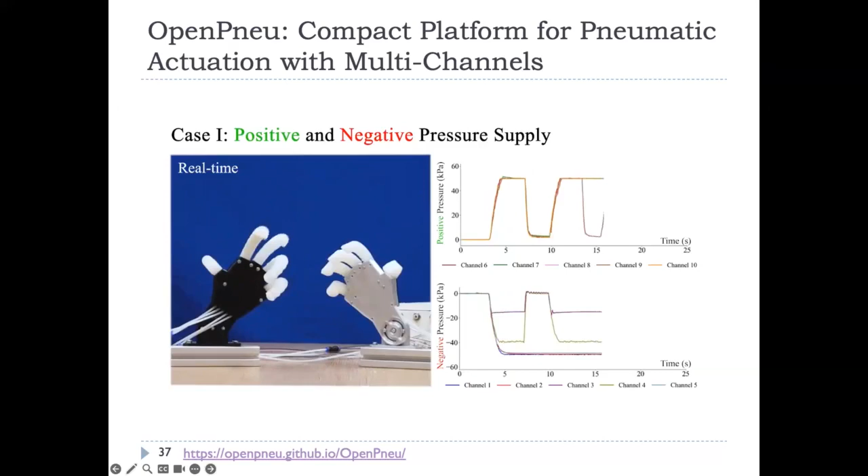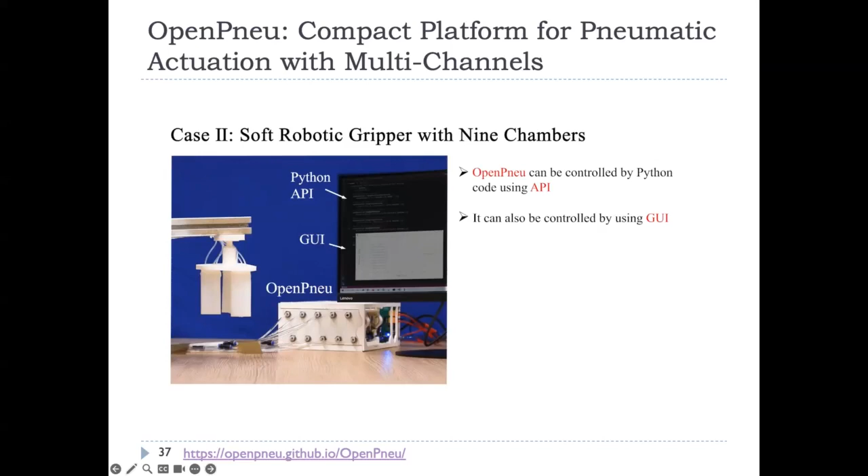We used this to generate a fancy setup for a rock-paper-scissors kind of game, and also applied it to the soft mannequin. This demonstrates how the open pneumatic system can be used to drive the soft gripper. If you're interested in soft robotics research, you can easily download these files and build your own pneumatic actuation system. This is a very safe setup - you can use it in a domestic environment because we designed it for use outside of the lab.

So you don't need to have high pressure really provided for them. It's actually low pressure control. So this is good for the general usage of pneumatic actuation for soft robots.

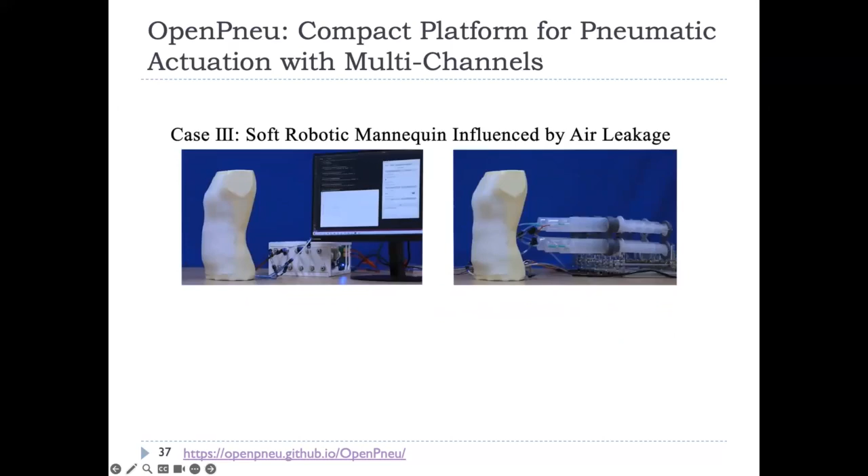Again, this is to demonstrate. I think this is important because with these syringes, you have air leak. And when you go into a large deformation, it's hard to sustain the shape. So you can see the syringe go up, and then air leak happens, it starts to drop.

But we solved this because you're using flow control. It's easier for you to keep generating air to pump in, and that gives you better control of the pneumatic actuation.

So in summary, I'm very happy to share with you guys about our recent research, trying to use a geometry-based simulator as a core, and we apply it to different problems like inverse kinematics, real-time control, asynchronous learning, all based on a good simulator. As long as you have a good simulator, you really have a very important setup which is able to help you tackle different issues.

And recently we've been working on using the differentiation property of this simulator to have a better setup or design for sensing distribution and chamber design, all based on a good simulator which can be put at the core of optimization. Here we just demonstrate using optimization to solve a kinematics problem, but you can also use it to solve design problems, sensor distribution problems, or picking the number of sensors. All these issues can be solved.

But of course, there are much more challenging issues to tackle, like tailor-made deformation and customized mechanical properties. Recently we saw work that really achieved designed displacements and stress distribution, and that heavily relies on a good simulator, which helps you.

This demonstrates what we did in our digital manufacturing lab. One aspect, we do a lot of soft robotic stuff. The other aspect, we do a lot of 3D printing stuff. And this is the most recent research.

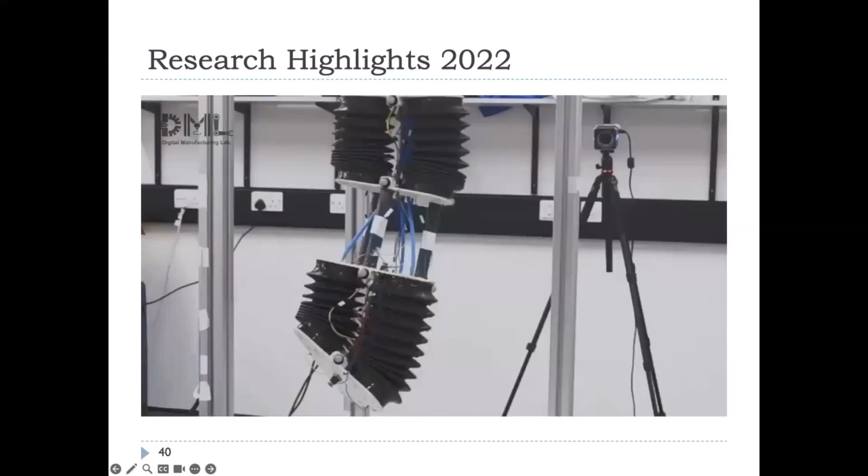This caught a lot of attention in the last week, because we just made it ready. We're actually using curved layers following the stress distribution, trying to maximize the performance of continuous carbon fiber. Compared to those planar layer-based carbon fiber fabrication methods, we can achieve around 5 to 6 times the breakage force.

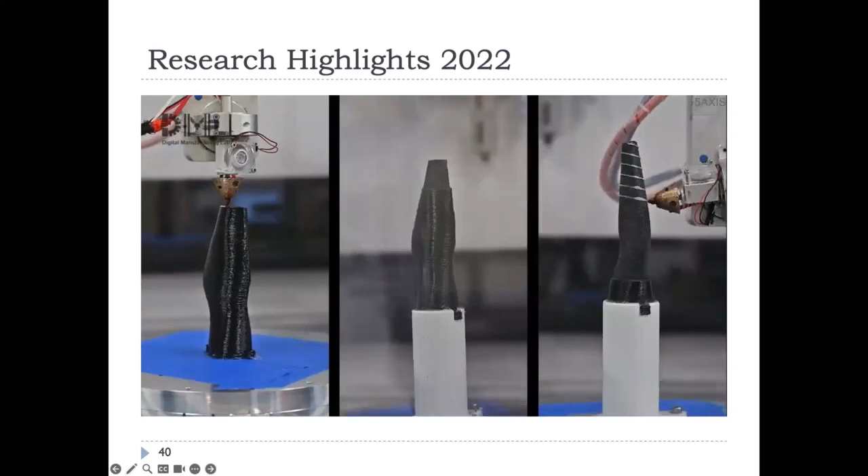I mean, those breaking forces compared to planar layer-based fabrication. So Airbus is quite keen on that, which is why they sponsored our project. And I'm lucky, based on this idea, I got the EPSRC Open Fellowship this year, so we could focus on this.

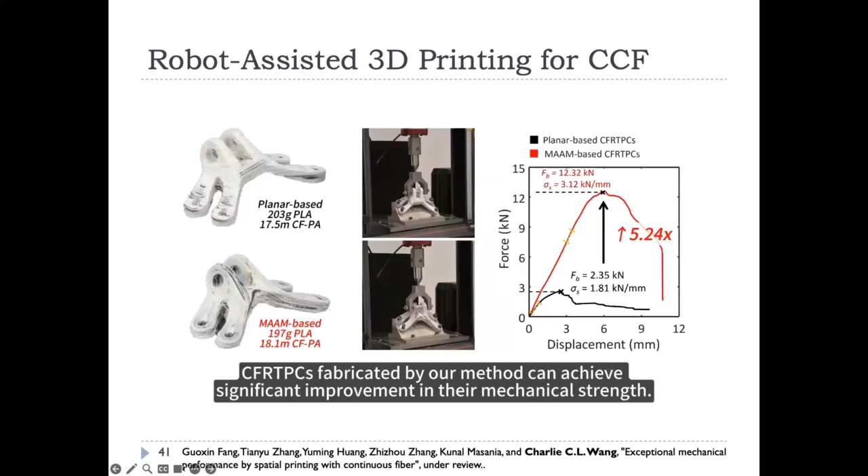So you can see the difference, 5 times. The same amount of continuous carbon fiber used in the fabrication, but just using a different way to actually fabricate it.